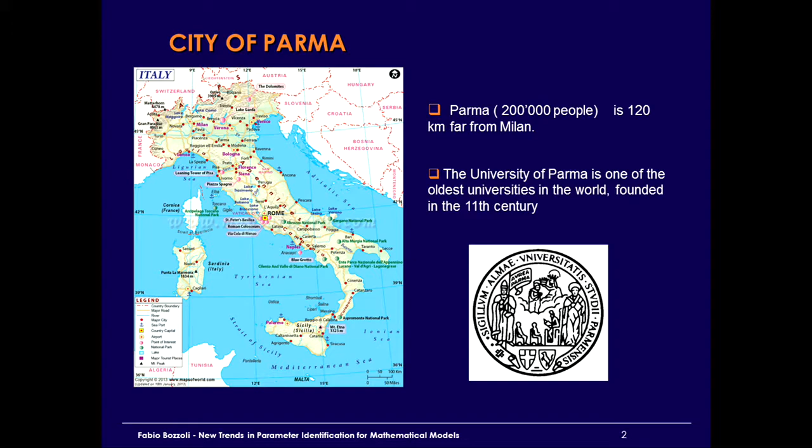So it's a long historical university about every kind of research and field, from literature, arts, and engineering as well. So, some details about Parma. Maybe some of you already know that, but Parma is famous in the world for music. If you are a fan of opera music, for example, Giuseppe Verdi was born in Parma, so lived in Parma, and if you listen to opera, maybe it was written and played in Parma. After that, movies. If you are a moviegoer like me, you should know Bernardo Bertolucci. He's an Oscar winner, film director. He directed Last Emperor, for example, but many other movies. He's still alive, he's still working.

If it's not, if it's fake, maybe it's coming from China or something like that. But if it's true, if it's expensive, it's coming from Parma. Parma has earned the reputation of being the Italian capital of taste, not only for the food, but for the companies. We have about 20 leading international food companies settled down in Parma. Looking into numbers, to money: the turnover of the companies in Parma connected to the food industry—I'm talking about food, but also about plants, not only foods inside of dishes—the turnover is about $25 billion. Compared to the turnover of Italy, that is 100 billion, it means that in a very small city, you have a lot of engineering aspects about foods.

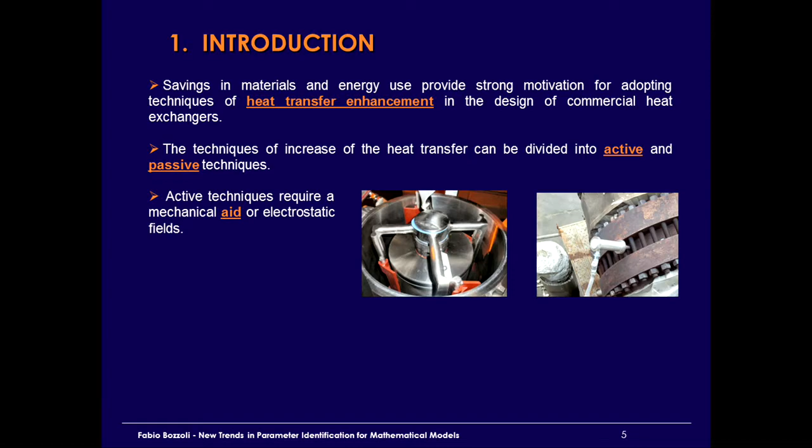They are interesting, but they are quite expensive and complex. For that reason, passive techniques are much more interesting.

In passive technique, you don't require any external power. You just change the shape of the surface, or you put inside some insert to change the flow field in order to enhance heat transfer compared to the straight plain tube.

Two classical cases are coils. If you just turn, you can improve heat transfer. Or if you are adopting corrugation on the surface, you can improve your heat transfer very much.

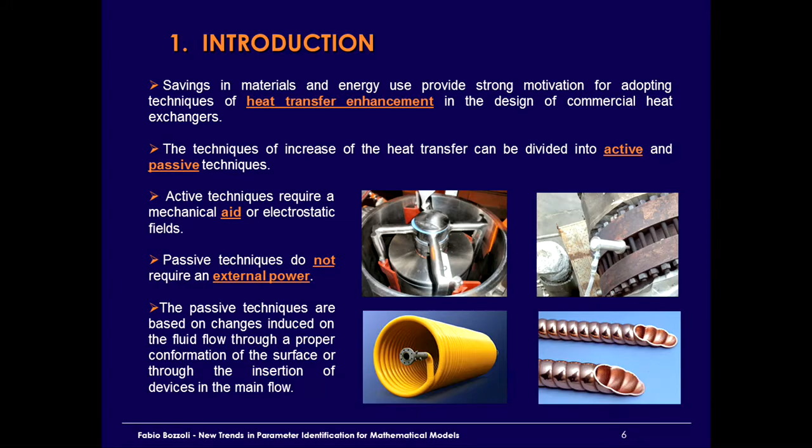Another kind of passive devices is inserts. Inserts are elements that you are placing inside the tube, and they help to enhance heat transfer. They are extremely interesting because they are quite cheap, and also the installation is very simple, and also the maintenance is very easy. You just have to remove, clean them, and put them inside again.

Among these kind of devices, one of the most important and biggest groups is a category named displaced enhancement device. The name is a little bit tricky. Why is it called displaced? Because these are devices that are not changing the surface, but they are changing the mixing inside. So they just displace, meaning move, the fluids from the wall to the center in order to mix everything.

Some cases, quite easy, are conical rings. You have some devices that are moving the fluids next to the surface, or pipe-shaped inserts. There are microchannels that you place inside, microtubes, or you have a lot of shapes.

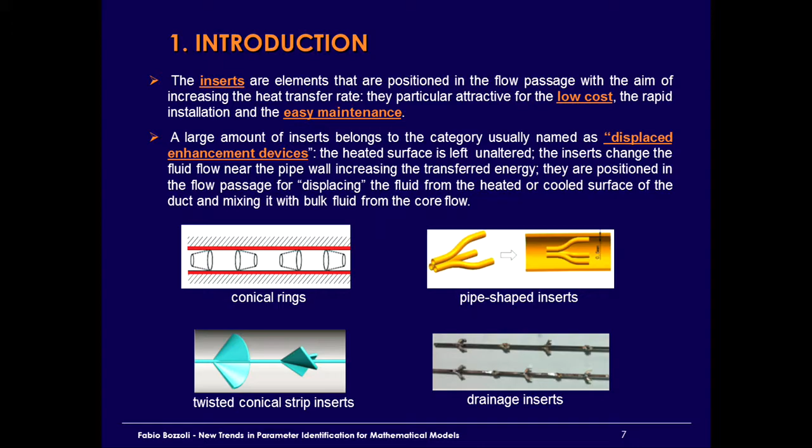There are strip inserts, so you have these strips that are mixing the bulk. And if you have phase change, for example, it could be interesting putting inside some drainage insert that moves the droplets from the surface to the center, and so on.

In this paper, we are dealing with this kind of device, and in the majority of published papers, they are really deeply investigated, but usually you find the performance only in terms of average heat transfer value. So you measure the input, the output, the average temperature, and you have a global performance.

It's not easy, it's rather impossible to find some local measure about heat transfer performance, because it's not easy to place a sensor inside, and as you know, measuring flux is not really so easy. Moreover, usually you have fluids that are acidic or at high temperature, so they destroy the sensor.

So the aim of this work is filling this gap, trying to estimate the local behavior in terms of heat transfer of these strange-shaped devices.

A way for overcoming the limit of placing a sensor inside is using an inverse heat conduction problem. That's the main idea of our research. We are going to measure the temperature on the outer surface, and we are going to estimate what's happening inside. It's a classical, very easy from a theoretical point of view, inverse heat conduction problem.

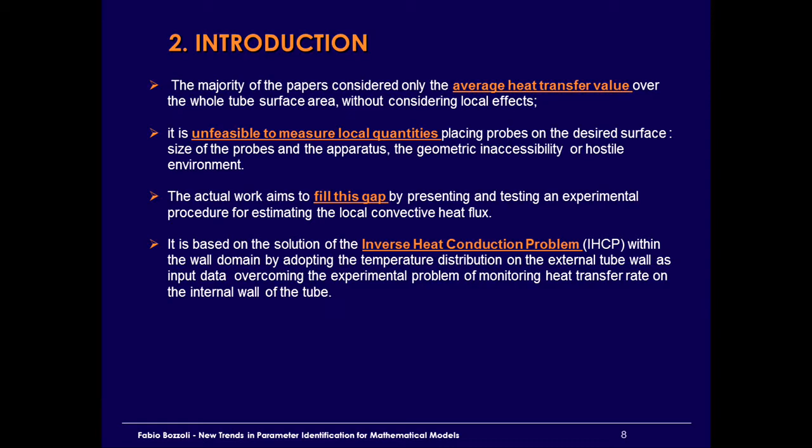So let's talk about the setup. The devices are fixed on a thin rod placed in the middle of the tube, and they are made of plastic, and they are placed inside a stainless tube of about 13 millimeters. So looking at the device, it's 13 millimeters, and it's placed inside a tube of 13 millimeters. This means that the position is perfectly fixed.

You have just a small contact between the insert and the surface in a few points, but it's important to center it. Otherwise it moves and it's not easy to keep it fixed.

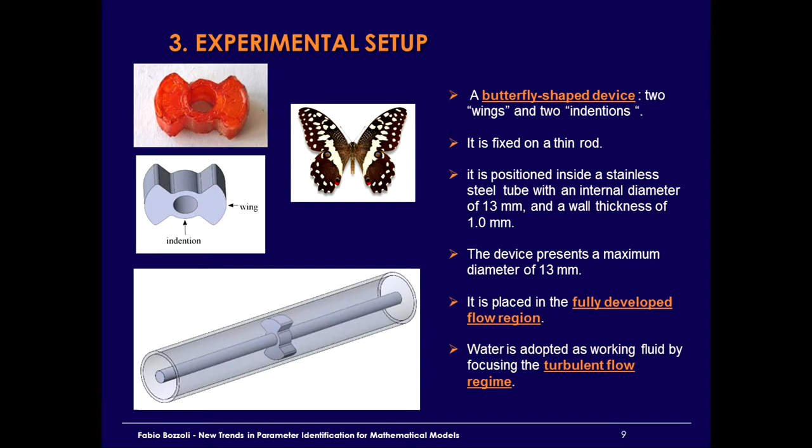In this case, we are focusing on turbulent flow regime. You can find this kind of device applied to laminar, but also turbulent regime. We are focused on that, and for this reason we are going to use water or glycerol, for example, for studying Reynolds numbers that are interesting in this case.

This is a sketch of the setup. Let's spend some time on this. This is the pipe, and in this pipe here, more or less, you have the insert, the device inside.

We are going to heat it up, and the easier way to heat it up and maintain it visible is using Joule effect. So you place two electrodes and connect that to a power supply, so you have electricity heating up the volume of the tube, not only the surface.

We have a volumetric pump, so the fluid is circulating. It's important to have a holding tank so you can mix everything and keep a very steady state. We are going to study steady state conditions, and later on you will understand why it's important to keep it steady. So you need a very big holding tank.

As far as it's a closed loop, you need a secondary heat exchanger to keep the temperature in the inlet section fixed. You need some hours to reach the steady state condition in a setup like that, but you can reach that.

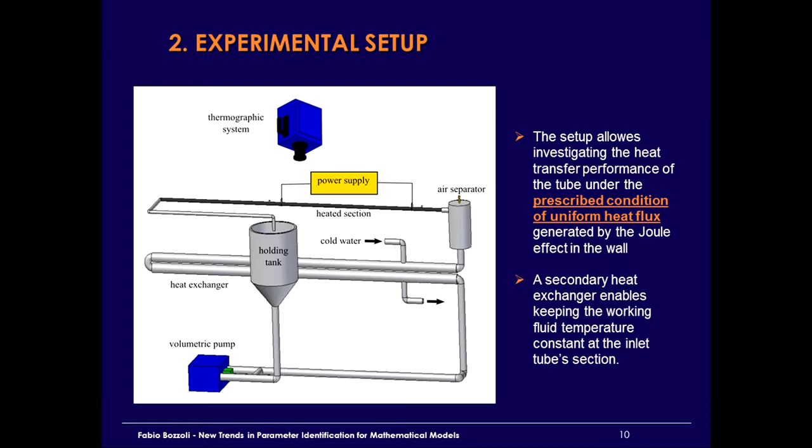Let's focus on this section, on this area. You can see here we have a thermographic system. Thanks to our infrared camera, we are going to acquire the temperature on the surface. That's the way we are going to acquire the temperature.

Let's see here, this is the heated section. We have some insulating material to keep it insulated, of course, but you need a test section that is not covered, otherwise you can't measure the temperature on the surface. It's not so difficult to do that - you uncover that, and thanks to this infrared camera, you can acquire the temperature.

To do that, you have to move the camera around and acquire different images to merge together. That's the reason why you have to be in a steady state, because as far as it's a very sensitive camera, it's very expensive, so you can't have many of them. You have just one, so you have to move it, and for that reason you have to be sure you are in a steady state condition.

About the test section, it's very important that emissivity is constant. You have a high emissivity surface, so you have to coat it with a very thin layer of paint with high emissivity. You know the emissivity, and it's very important to keep the environment at a fixed temperature in order to exactly measure the temperature of the surface, because it reflects a little bit.

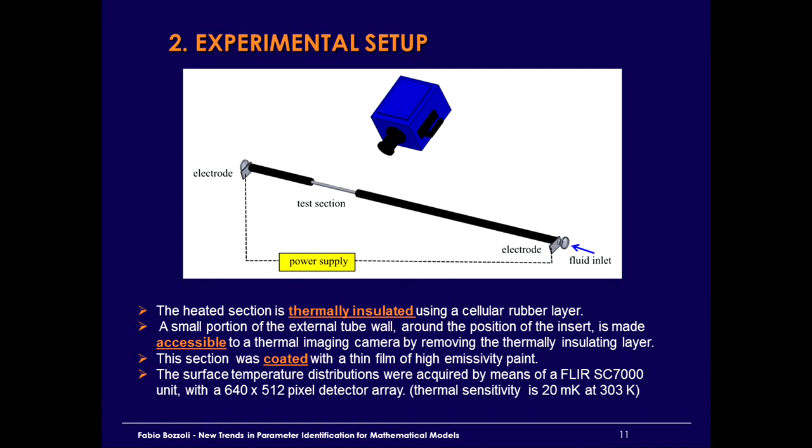About the camera, it's a FLIR camera. It's a very high quality camera because the temperature difference is very small. This camera has a sensitivity of about 20 millikelvin, which is very small - it's not the error, it's the sensitivity, meaning it can catch a difference of about this quantity. And it's a high density sensor, with a resolution of about 640 by 512 sensors, so a lot of points with a single image.

So some details about the estimation procedure. First of all, we are heating up the section of the tube by the Joule effect. We are going to acquire the surface temperature, and by solving the inverse heat conduction problem in the wall domain, we are going to estimate the heat transfer rate inside the tube. We estimate it point by point, so a spatial distribution on the inside surface.

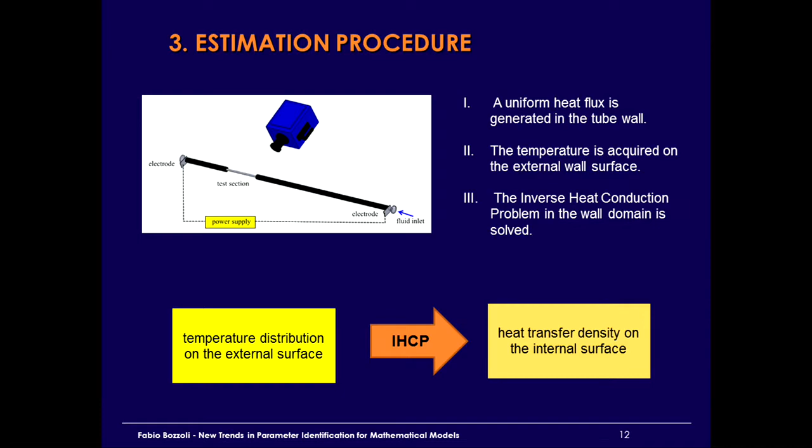In our inverse problem, the input is the temperature distribution on the external surface, and what we want to estimate is the heat transfer density on the internal surface of the tube. So it's quite a classical inverse heat conduction problem. Of course, to solve an inverse problem you have to model your reality in a certain way - in this case, we are modeling just the tube wall.

We are not modeling convection inside, just the tube wall, because we are interested in what's happening on the surface, on the boundary condition. So it's a classical 3D model. It's a cylinder, very easy.

So how do we describe that? We have the energy balance in the solid domain. So it's just the wall, our model, nothing more, very easy. Of course, you are heating it up by Joule effect, so you have a heat source inside the volume.

After that, the key point are the boundary conditions. Looking at the outer surface, we have external boundary, and it's classical. Renv is a thermal resistivity between the surface and the environment, where Tenv is the temperature of the ambient environment. You can estimate this one quite easily.

The sensitivity of your problem to this quantity is very small. If you double that, the results are almost the same, because you have natural convection with air outside, while inside we have forced convection with water. So the magnitude is completely different, so it's not a problem to overestimate or underestimate this quantity in your results.

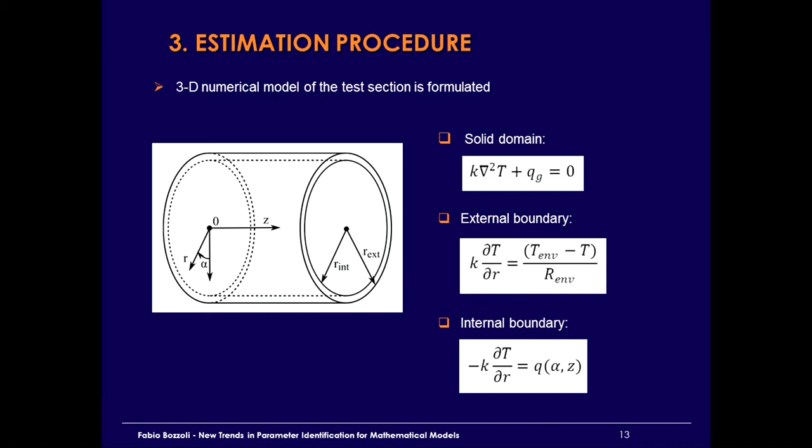I look to the coordinates. Alpha is the angular coordinate, and zeta is the axial coordinate. Of course, we also have radial coordinates, but as far as we are going to estimate on the internal surface, the radius is fixed at that point.

Of course, two boundaries are missing in this case, the side boundaries. It's not easy to understand what kind of boundary condition we are going to apply in real life, but if you look at the setup, if the test section is long enough, it's quite acceptable to think that the temperature gradient here is close to 0. You can neglect that, because in this section you don't have strong variation. It's like having a straight tube, so axial variation is very small. So next to the side boundary, an adiabatic condition can be adopted.

And we are going to check that on the experimental data, if it's acceptable.

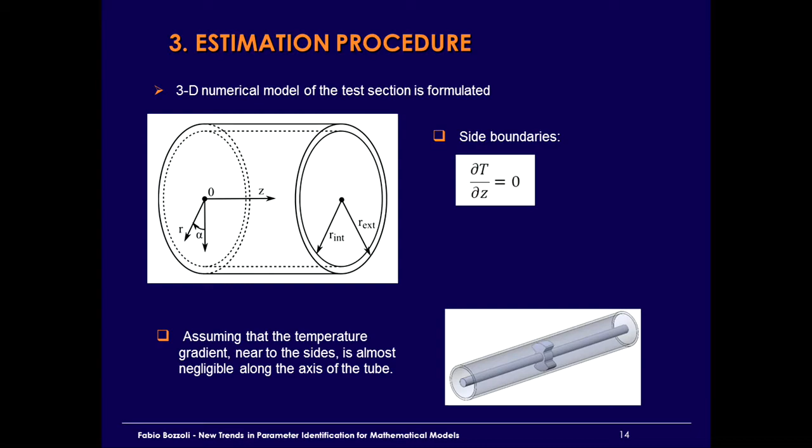Let's move on. Of course, we have a continuous domain, and we are moving to a discrete domain. To do that, you have to simplify the convective heat flux distribution, adopting, for example, a continuous piecewise linear function. It's linear, it's continuous, it's piecewise. So this is the expression at one of those points.

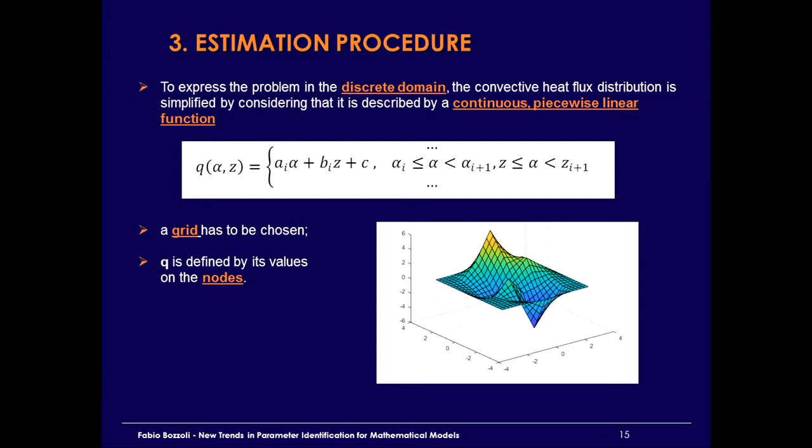So it means that you have to choose a grid, and in that way, the heat flux distribution is defined by the value assumed at the nodes.

So going from a continuous function to a discrete function makes your problem expressible in a matrix form quite easily, where T is the vector, or the discrete vector, of the temperature on the external coil surface, and Q is the heat flux vector on the internal fluid wall surface. So it's quite simple, a normal matrix expression of a classical linear problem.

Some details about X. X is the sensitivity matrix, describing the geometry in a certain way. To calculate that, you can do it quite easily from a numerical point of view, for example using a two-point difference approach. You solve your direct problem, then you perturbate that, just increasing one of the values, and calculate each element of the sensitivity matrix.

As far as you are generating some heat inside the wall, you have also this constant vector, which is not very common in this kind of problem, and it's quite easy to determine. You just have to solve one direct problem considering the heat flux on the internal surface equal to 0, because you have internal generation, so you have a non-homogeneous term, and you have to consider that.

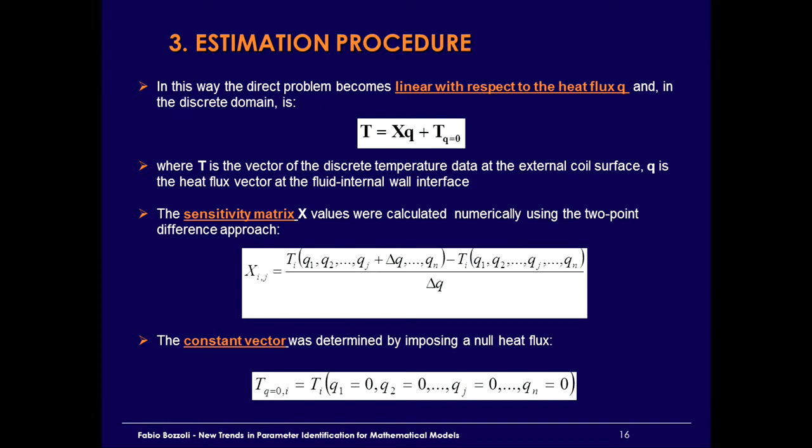So the technique to solve that is the classical Tikhonov regularization method. You know we are talking about that in almost each presentation. You just move to a well-posed problem, and you overcome this ill-posed nature by defining a cost function. It's a weighted average between the residual and the smoothness of your solution. The key point is choosing the regularization parameter, lambda, because it's not easy to choose that, and it drives your results very strongly.

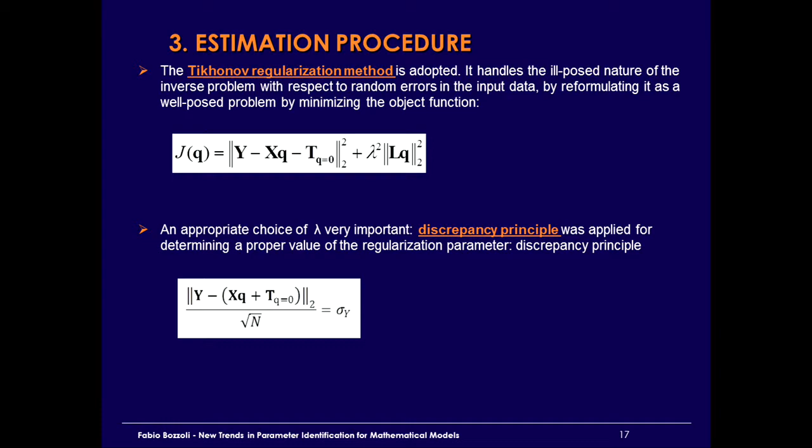So we are going to adopt the classical Morozov principle, the discrepancy principle. It means that you know something about the noise on the temperature. So you tailor that parameter as far as the average value of the residual is equal to the expected noise. So let's go on.

First of all, we are going to validate this procedure from a numerical point of view. It's the classical way, we are adopting synthetic data. For doing that, we are adopting a geometry that is quite similar to the experimental one, not very far.

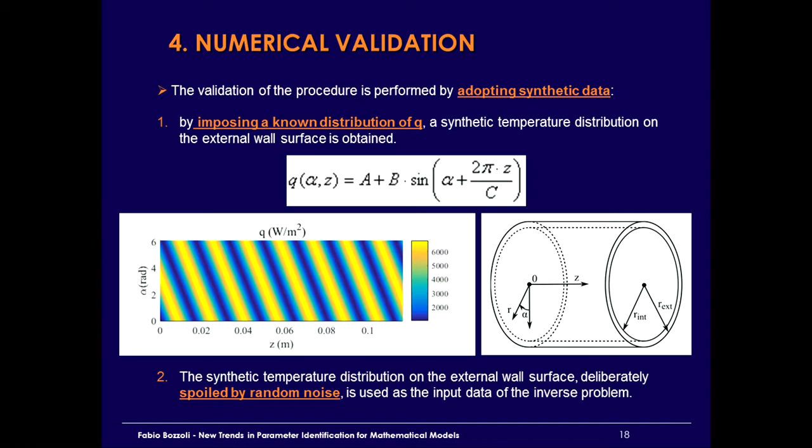You solve the direct problem. You spoil your data temperature with random noise, and you use that for solving your inverse problem. You compare what we are imposing with what you found.

Of course, it's a sort of inverse crime, but if you solve, for example, the direct problem with COMSOL, and you calculate your sensitivity with MATLAB with a different approach, you can overcome it a little bit, not too much. A little bit you can overcome that.

So let's move to results. Some numbers about this matrix. First of all, about temperature: we are considering 180 angular positions and 550 axial positions. It means 99,000 elements, a lot of elements.

After that, about heat flux, exactly the same grid, something like that. It means 180 angular positions and 550 axial positions. So it means that the matrix of heat flux is composed of 99,000 elements, a lot of elements.

If you look at the sensitivity matrix, it's crazy. It's a very huge matrix. It's something like 99,000 rows for 99,000 columns. It's a huge matrix from that point of view.

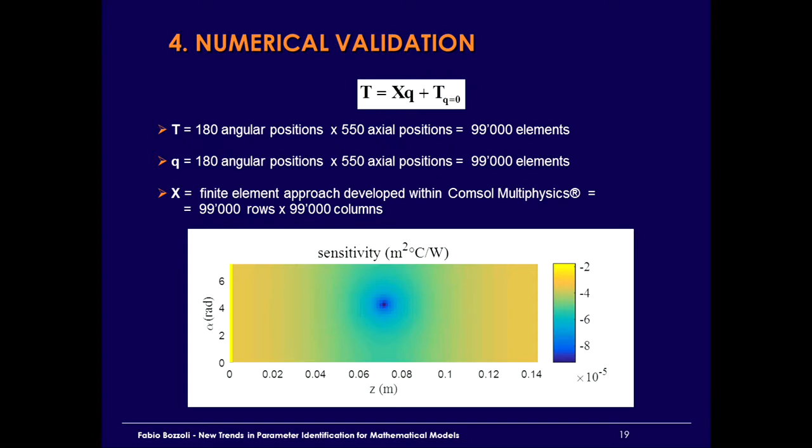Let's try to plot it. You can plot it, for example, for one source point. You can look at the sensitivity matrix, rearranged on the plane. It's a line in that case. But you can see that the problem is very sensitive close to the source, and as far as you are going farther, the sensitivity goes down closer to zero.

If you move the source close to the side boundary, you can see that the effect on the other side of the domain is practically not noticeable at all. It's interesting to look at the sensitivity matrix and how it looks, because it gives you some information about the approach we are going to take.

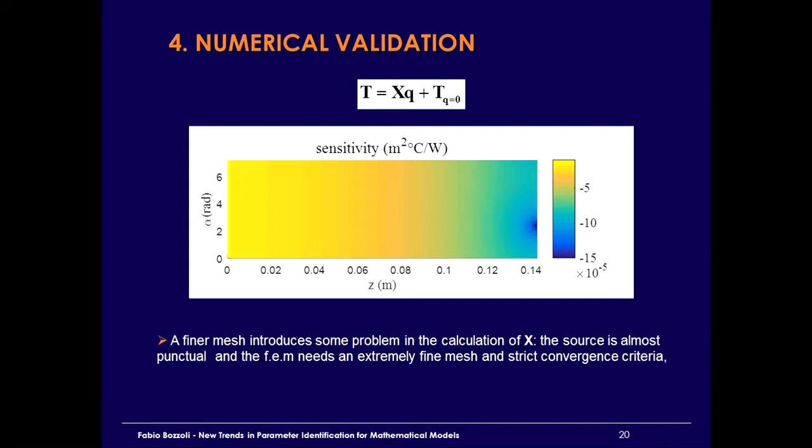Some details about the practical point of view: it's not easy to calculate that from a numerical point of view. If you increase the number of points, it means you have to solve your numerical problem with very small point sources, and you need a huge mesh to solve that, to solve your problem. So let's compare.

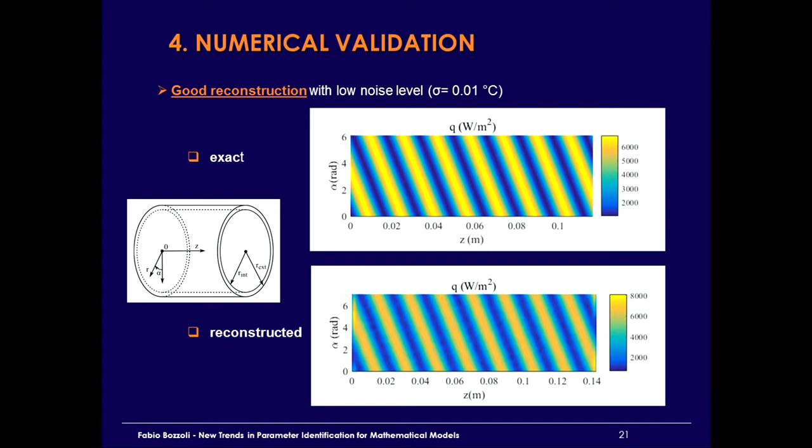Of course, we are going to plot, for example, the values for one angular position. And you can see that the match between the exact, in blue, and the restored, in red, is very good, except close to the side boundary.

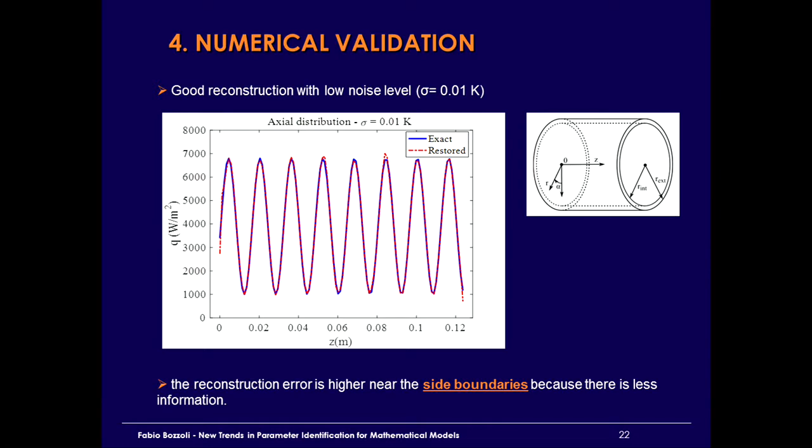That condition is a little bit tricky, but it's quite common in inverse problems. Close to the boundary, you have less information, so it's not so easy to estimate correctly your quantities, because you are missing some information. You have more information in the center than at the boundaries.

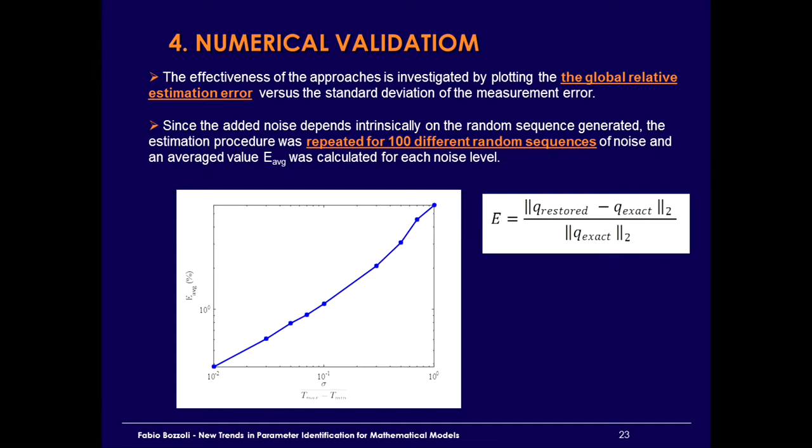We are moving that into 6 positions. It's important to keep it orthogonal to the axis of the tube in order to minimize perspective problems. So if it's orthogonal, it's easier to reconstruct the temperature later on.

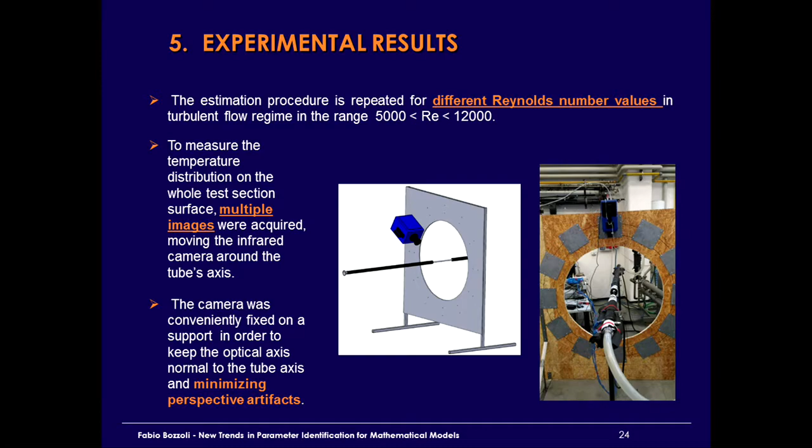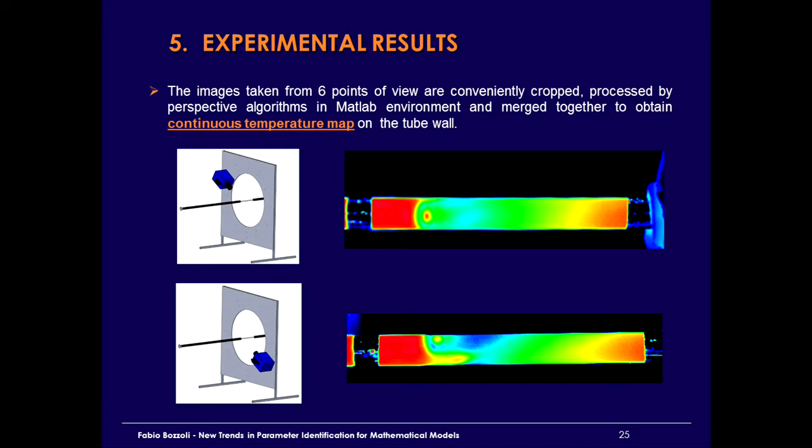Some pictures about that from two different positions, you can see that picture. Another key point, you need references, because when you have to merge together images, you need references on your domain. So you have some label that you can see in the infrared that enables you to merge all the images. Of course, it's not only a problem of merging, you have to correct the curvature.

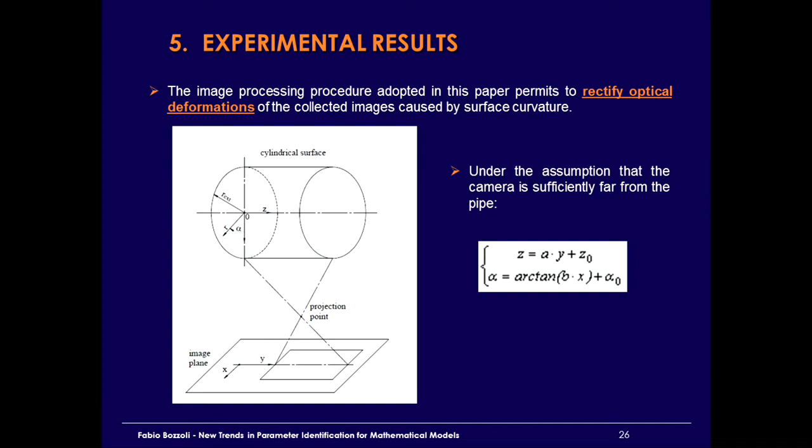It's quite easy because it's a cylinder and you're rather far from the cylinder. So you have to move from the projection coordinates to the cylindrical coordinates. The equation is extremely easy. You can calibrate that, for example, with a known pattern if you don't know some of those geometrical parameters, but it's quite easy.

So we have 6 images. We correct them for perspective, so we make them flatter. And after that, we cut and merge them together. In that way, we have a continuous map of the temperature on the external surface.

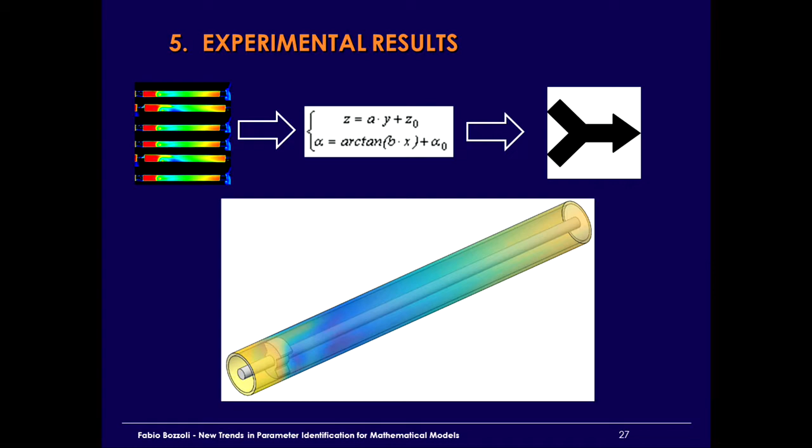This is a nice plot. You can see that the temperature is higher here, and after you have colder points or something like that. But it's very good from a qualitative point of view. It's better to plot like this.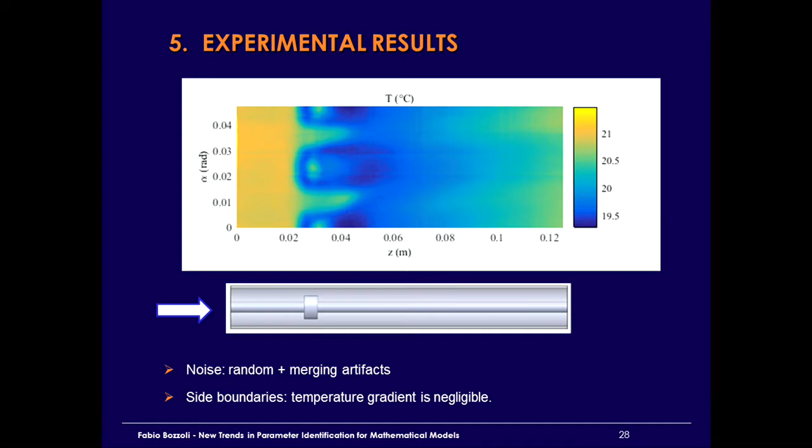After that, you can see that you have noise, of course. You can see some random noise, but you also have some artifacts due to the merging procedure, because yes, it's steady state, but it's not so steady. Differences are very small. You can see the map is going from 19 degrees to 21, so you have a difference of 2 degrees, which is very small from that point of view. So if you are merging something that is not so in steady state, you see some linear artifacts here.

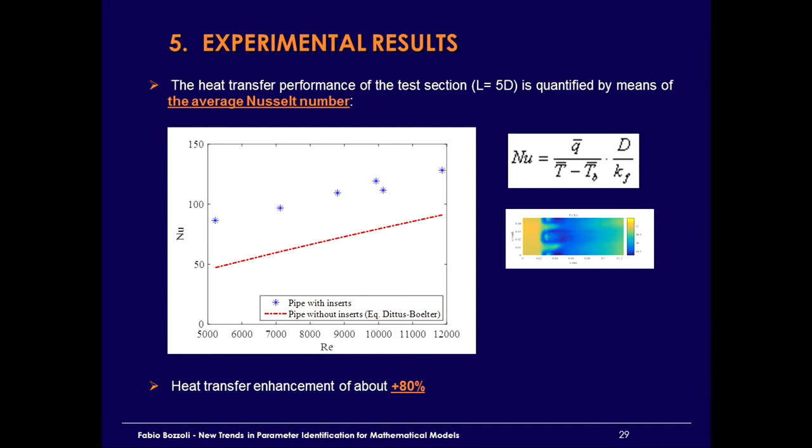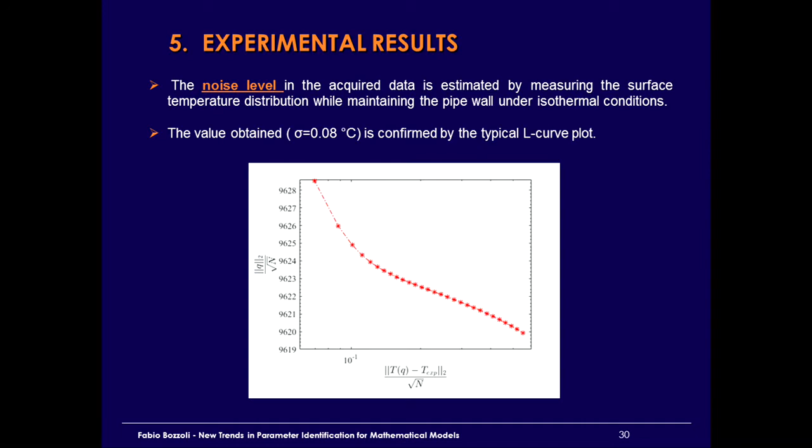But it's not exactly what's happening in reality, because we are merging different images that are not flat. So another way is adopting the classical L-curve plot, and you can see the knee is something like this, and so the noise level is something like 0.1 Celsius, which is more or less the same as we obtained estimating the measured temperature in a constant condition on the surface. So we have two elements that confirm that the estimation of the noise level is correct.

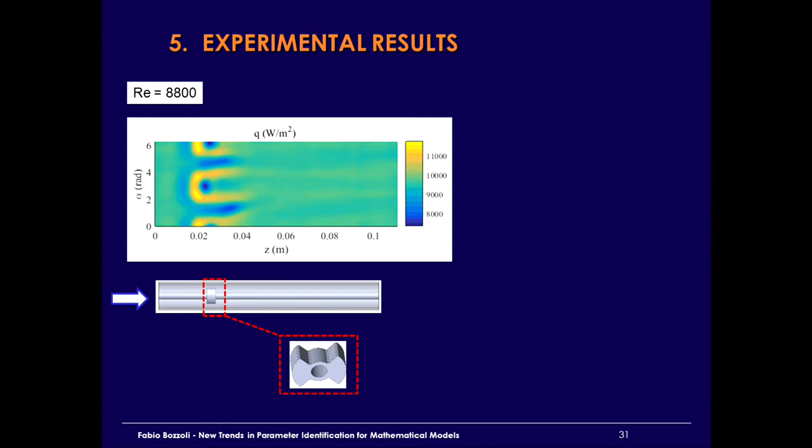Let's move to results. Let's see one case, 8,800 Reynolds number. This is heat flux density. This is the position of the inserts. You can see here that you have some maximum and minimum close to that.

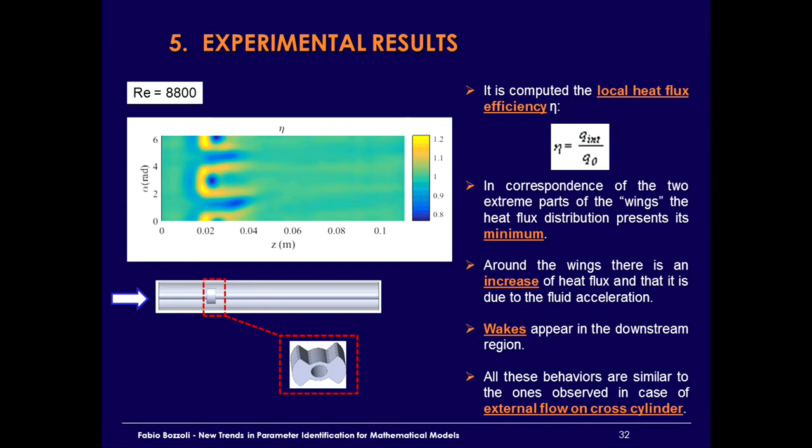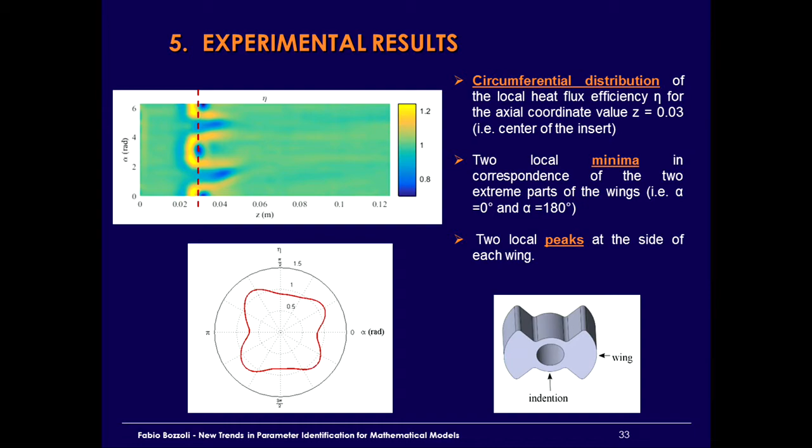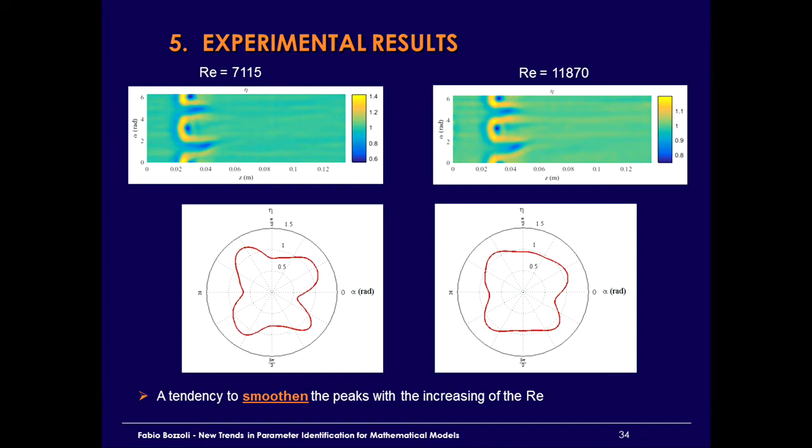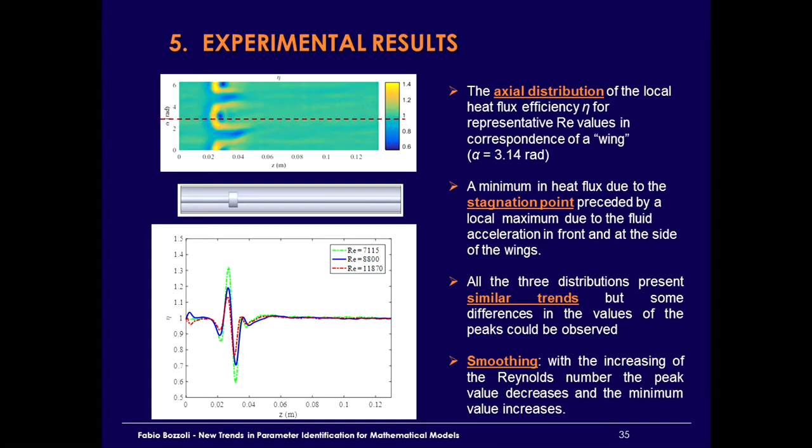Same effect regarding Reynolds number: if you increase the Reynolds number, you are smoothing things out. You are increasing heat transfer, but you are mixing better.

In conclusion, we have adopted and tested an experimental procedure based on the inverse heat conduction problem to estimate what's happening locally inside these kinds of devices. These results are interesting because you can design these kinds of devices from a local point of view, since in some practical applications it's not only the average performance that's important, but also the local.

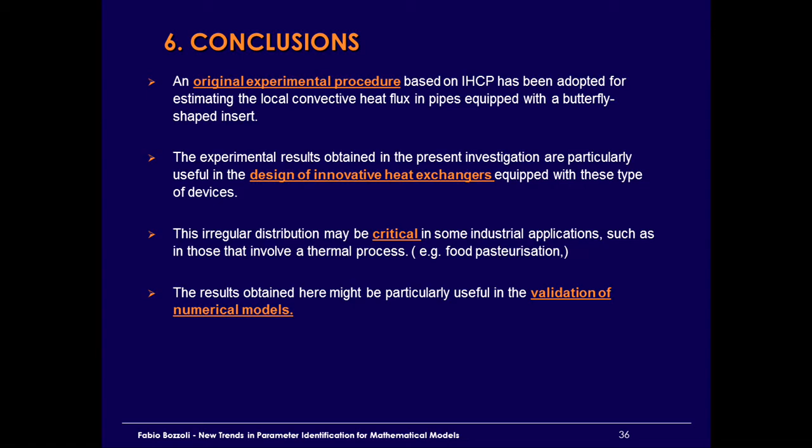Talking about the food industry, for example, if you have to pasteurize milk, it's important not only the average temperature, but also the local temperature. Because if you overheat your food, you destroy everything, you change the taste. And if you underheat it, you don't kill the bacteria. So it's important, since it's a very strict thermal process, to control not only the average temperature but also the local temperature.

Moreover, this data is quite original and can be employed for validation, for example, of numerical models. We have wonderful numerical software, but it's usually validated on average heat transfer coefficient, never on local ones. If you try to validate it on local experiments, you can find unexpected results, because they work on the average, never locally. It's very difficult to make them work.

Next step, we are going to study different geometries and configurations. Thanks to 3D printers, you can change almost everything in order to optimize it. But the most important thing related to the inverse problem is that we are going to use this like a benchmark for different estimation techniques. So if you want to test your technique on our data, it's available. You can test your approach on 3D cases with a lot of experimental data sets you can employ. We are going to employ a reciprocity functional approach, for example, Gaussian filtering, but many other approaches are available for solving this kind of problem.